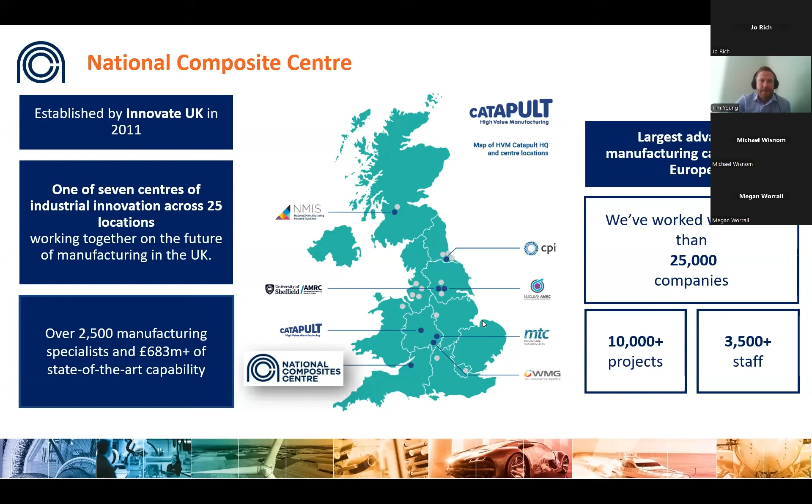A key element of our work is addressing industrial transformation. It means resolving deep and complex technology challenges, supporting people with new capabilities that meet the requirements of future industries, and supporting the growth, resilience, and sustainability of our existing and new supply chains. An example from our impact report is we've resulted in a £59 million direct gross GVA per annum and seen a 16% increase in supported organisations' turnover within 6 years.

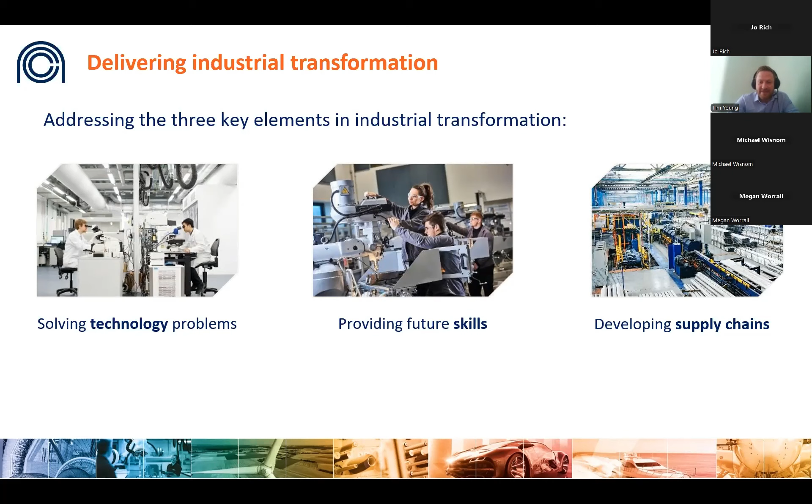The NCC's core strength is as an innovation platform. We work across all industries, such as aerospace, and all forms of mobility, energy transition, such as wind and security and space. Our composite manufacturing capabilities flex themselves to supporting academic pull-through of new ideas, from statistical models, new material concepts, through to detailed designs and analysis, manufacturing, verification of parts, subsystems, and assembled products. This is underpinned by our cross-cutting areas of technology research, hydrogen, digital, and sustainability.

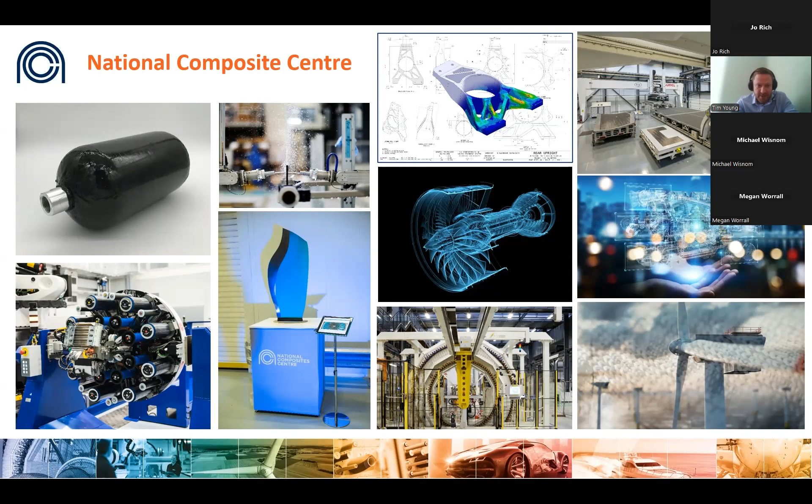With world-class manufacturing capabilities for composites, we've inherited some incredibly strong sustainability arguments, and our work supports key net zero technology developments in the 10-point plan for the green industrial revolution. However, as composites have exceptional performance and durability, we've engineered a material system that has massive benefits in the use phase, but that same durability means their derivation from non-renewable sources and complex end-of-life management is a serious challenge. It comes with the first key take-home: it is no longer acceptable to only focus on the in-use benefits of composites.

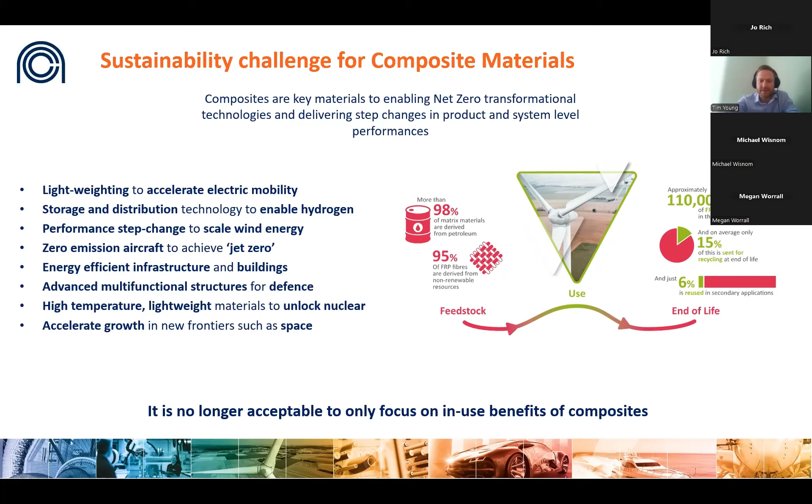What are we talking about, what else is there outside of the in-use benefits of composites? Over the next phase of the presentation, the outcomes of a body of work we've undertaken at the NCC to unpick what the real challenges are, not just to convince ourselves there's a problem, but to guide our recommendations based on facts for who, where, how, what, why, and more importantly, most importantly, when.

I'll then present the outcome of some work on the topic of the talk: what can we do versus what should we do, with a real focus on the circularity aspect on recycling. I appreciate there's a lot of aspects around defossilization and new materials, but the purpose here at the moment is on the recycling end.

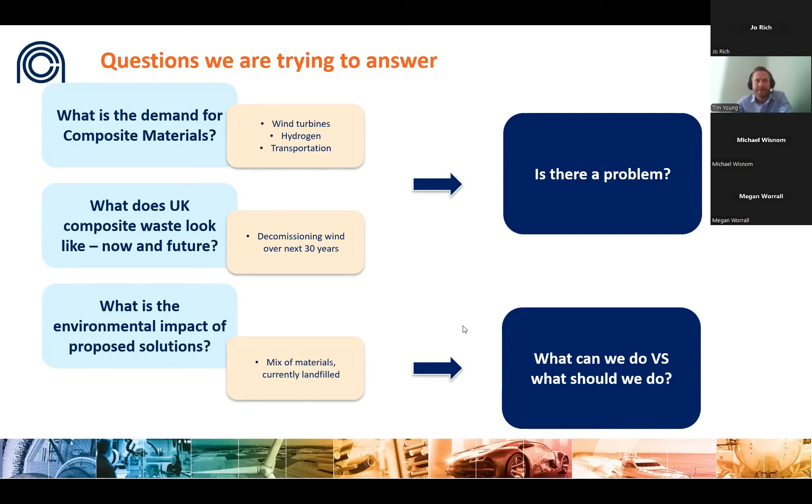There have been various studies based on UK total composite waste. The exact numbers vary, but they all agree that whilst we have a problem now, the current manufacturing output, coupled with known order books, growth forecasts, and projected life expectancies of components and platforms, puts the waste figure somewhere between 150 kiloton and 275 kiloton by 2035 in the UK.

I'm also sharing two snapshots of deep dive reviews on how the waste is manifested. Something particularly interesting to me from the wind study on the right hand side, just from UK offshore blade waste, is that the volumes today might be small, but they grow exponentially over the next two decades. And whilst we have a focus on glass, the increasing length of blade and use of carbon means that optimal solutions today for wind and other industries might actually need a rethink in 10 to 20 years. And it leads us to a big question: is it a one-size-fits-all approach?

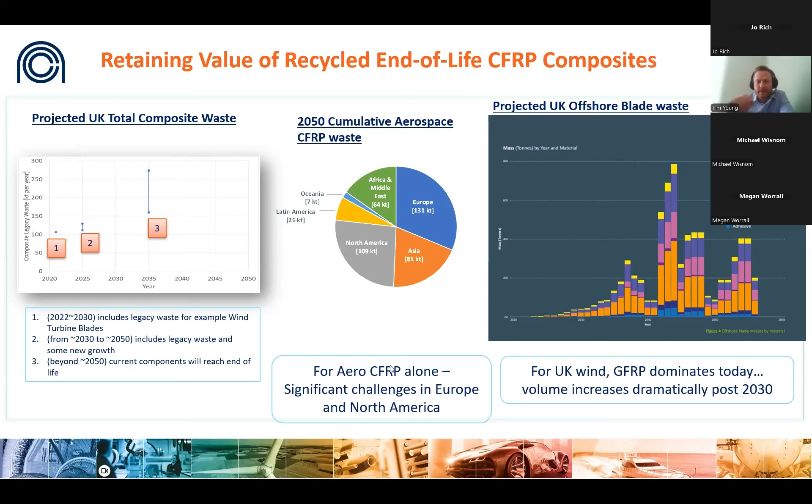So what are we doing? What's the backdrop to some of these challenges? What have we been looking at the NCC? The National Composites Centre has committed a significant portion of its available grants to build capabilities in sustainability.

So on the screen, I'm sharing a series of programs and projects around circularity, from network and review-based activities such as Rediscover, a network with representatives from a multitude of industries and academia, trying to highlight exactly what the challenges were. We've run four years of multi-sectoral pre-competitive research on recycling, covering everything from shredding to manufacturing of second life parts.

We're working across consumable waste. We've made some real strides which we plan to investigate further. I'm going to touch on the continuous fibre tank recycling work in a later slide. But overall, wherever possible, we've tried to maintain a technology agnostic approach to recycling, and in particular to the reclamation technologies. So I'm going to share some data and some of our positions and understanding going forward.

The last four years assessing and stress testing different technology options has been across manufacturing consumables through to full wind blade studies. And it's given us some unique insights into the practicality and, more importantly, the room for innovation.

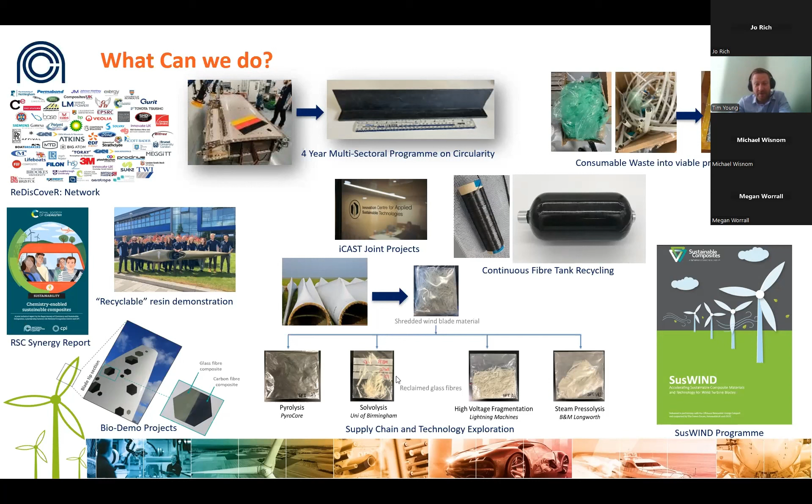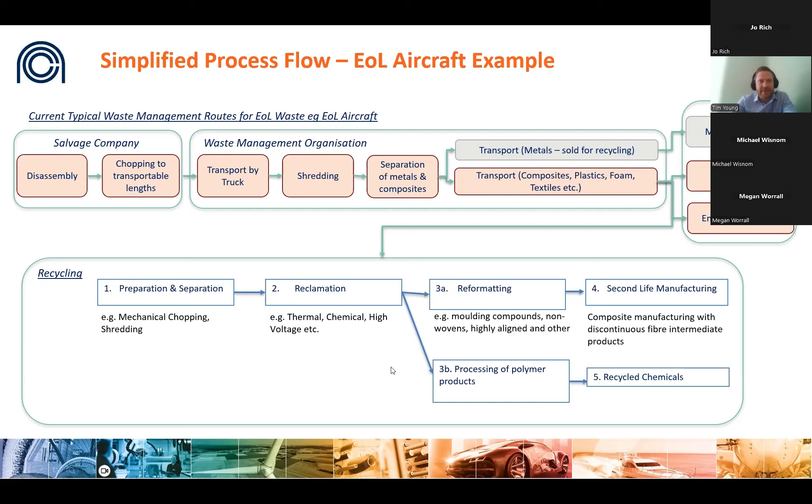So how can we change it? One of the areas we at the NCC hope to make a difference is to develop the product applications and therefore market for recycled materials, both fibre and matrix.

This is one of our flagship projects alongside the Henry Royce, Cygnet Texkimp and the National Physical Laboratory. The aim here is to develop quality assurance capabilities for recycled continuous carbon fibre. And what I'd like to see is real life data at scale and rate that can be used by designers for the next product.

If the uptake of carbon fibre is half of what is predicted, then recycled materials in application—and I mean the right application—will substantially reduce the system burden on our environment.

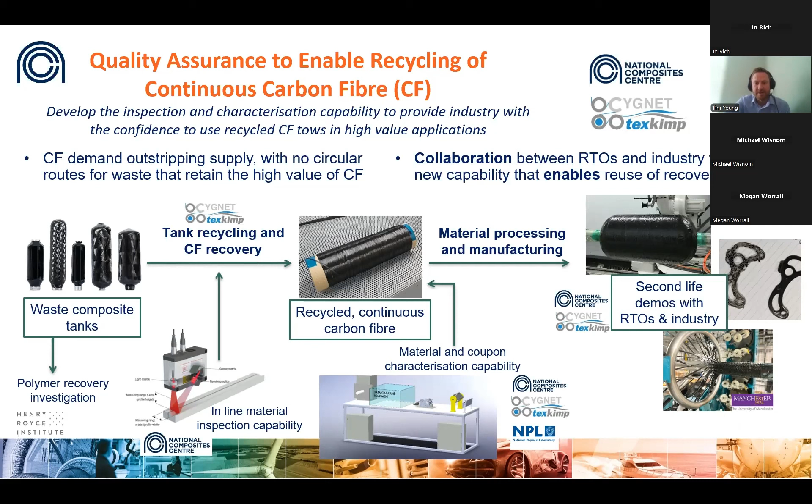Within SUSWIND, a programme at the NCC with a multitude of partners, industry and other RTOs, funders and asset owners, we developed a series of very specific scenarios to understand what pathways for recycling might result in the best outcome in terms of global warming potential and mass balance.

We first studied this for a wind blade system, and it was apparent that certain routes weren't viable, such as cement kiln, either because of the presence of PVC coatings in legacy blades or carbon in future designs. And it's raised a key recommendation that to achieve the optimal outcome, dismantling and separation of material types is required as early on in the process as is feasible, but ideally well before the system is shredded.

The gains or costs for glass recycling are quite small, but the volumes are really large. So mechanical recovery in cement kilns looks like the most optimal today. This is from data about 2022, particularly if the recovered material replaces and therefore reduces the amount of virgin material otherwise consumed or made.

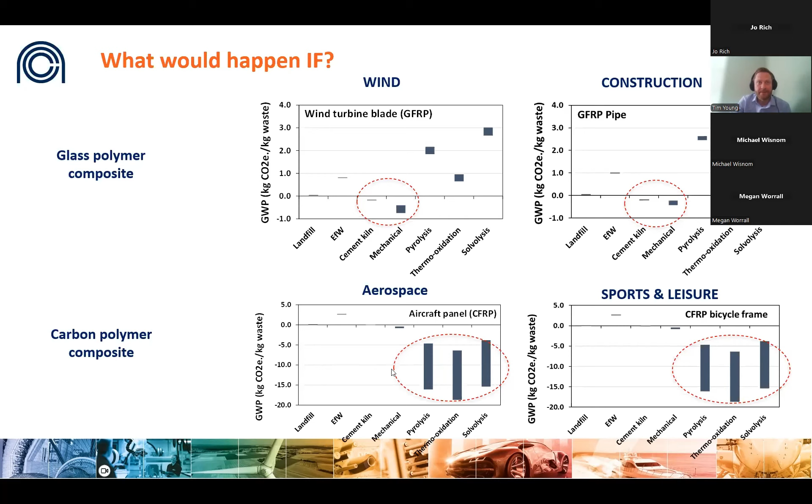So that leads us to an earlier question: what should we do? GFRP, glass fiber reinforced plastic, dominates by volume and has a significant landfill burden. CFRP has a larger potential to reduce global greenhouse gas emissions. It suggests to me two things.

We should use what capabilities we have today to reduce the burden of both materials. For today, that means adopting cement and mechanical recovery processes for GFRP. It also means utilizing and developing technology approaches for carbon reinforced plastic, and then applying those same technologies to GFRP as the existing routes phase out.

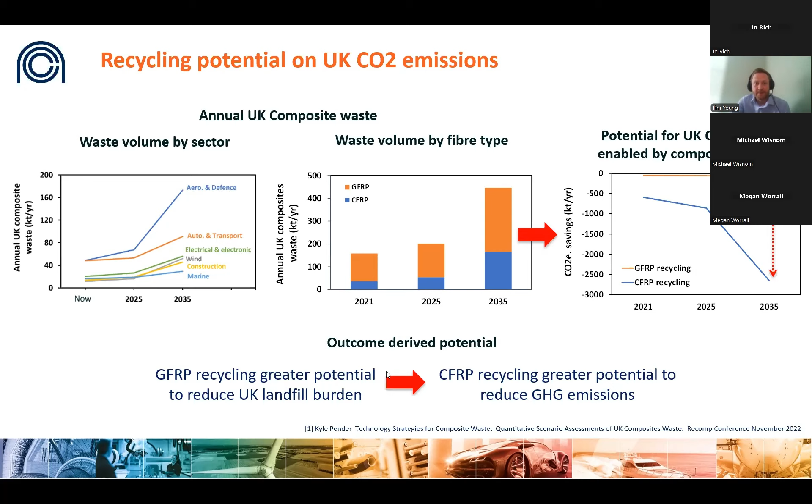As a summary, the data doesn't suggest that technical routes like pyrolysis shouldn't be used for glass, merely that they need development and scale in order to represent a better environmental option than the mechanical routes, for example.

This is why the NCC's focus is to develop these technologies first with carbon in mind, as well as to develop the surrounding system and economic cases to support the supply chains. How can we support those developing glass-based recovery methods based on the learnings we take from carbon?

This means everything from separation, reformatting, quality assurance, and all that's needed to see the recovered materials, both fiber and matrices, utilized in future applications.

As a note on the matrices, over the last few years we've seen an increase in the number of recyclable matrices, bio-based matrices, and other variations. These materials aren't always being developed in tandem with the supply chain or the technologies needed to manage them end of life. In the earlier scenarios, the matrix is either a waste byproduct or fuel in the process.

What we've proven is that glass and carbon recovery is technically viable. There's a significant opportunity to innovate and build the supply chains now and for a future state. But a key part of it is to innovate in resin recovery, both to support the economic case, but also to boost circularity and reduce the global warming potential of composites.

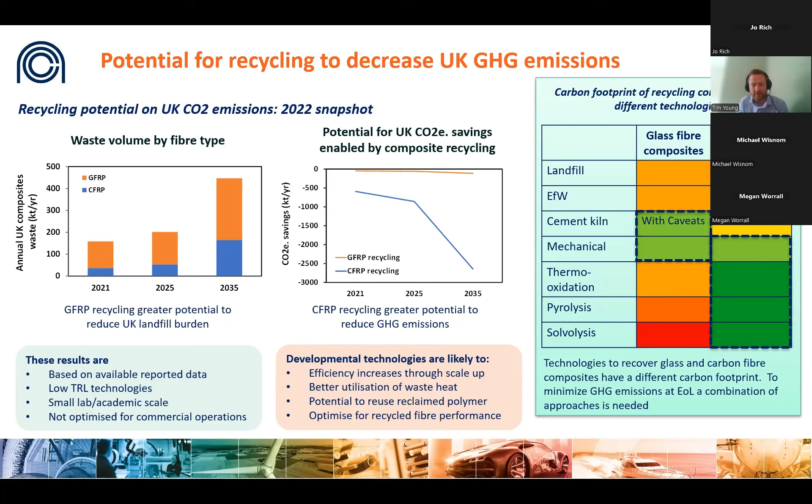So I just want to leave you with a few takeaways from our findings. We need to innovate across all technologies. We need to focus on target-driven approaches. Global warming potential is one metric, but we need to ensure that its priority doesn't inhibit us from taking any action at all. We can resort back to the use case argument.

Composites do and are essential in the delivery of key products needed for the 10-point plan. What we should do is innovate. Some routes have far better potential than we are realizing today. Collaboration is needed to pull on these supply chains, as today the numbers might be small, but the cumulative impact will require far more supply chain and technical capabilities in the future.

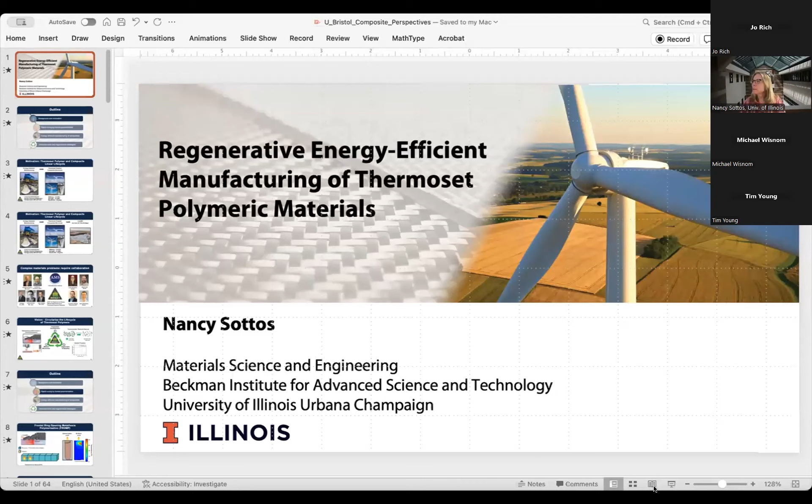So I'll get started. I'm Nancy Sottos, introduced earlier, from the University of Illinois, Urbana-Champaign, and happy to talk to you today about our work on regenerative energy efficient manufacturing of thermoset polymeric materials and composites.

So it's a short talk, but I even put an outline on short talks. I just want to provide some motivation for the strategy we are pursuing at Illinois, talk about a rapid curing technique by frontal polymerization, and then continue on to how we apply this to energy efficient manufacturing of composites, finishing up with how we use this to impart deconstruction and regenerative strategies for composites.

So starting out with the background, I think we know that thermoset polymer composite structures—this was outlined very nicely in Tim's talk—we've designed them to have high strength, high stiffness, and last for 30 years in some pretty harsh conditions. We also know that these materials, in order to get these properties, have a very energy intensive manufacturing process.

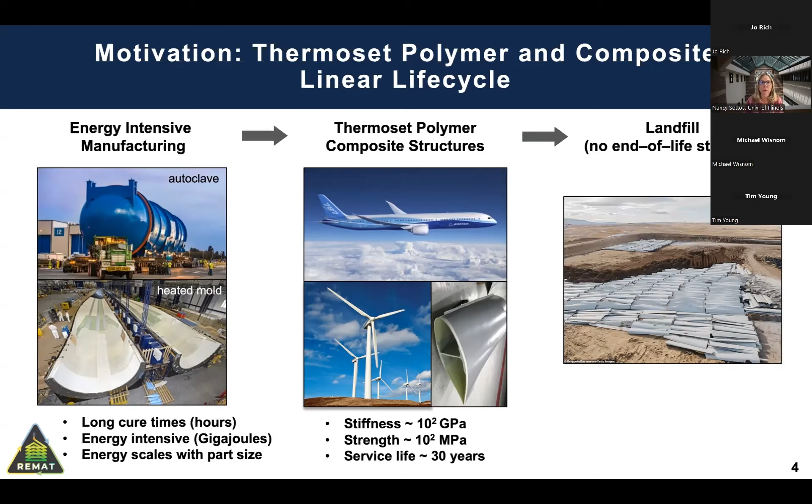The cure times are long in order to get the cross-linking up. They're energy intensive—the part gets larger, the energy keeps scaling with the part size. And also, there's really no viable end-of-life strategies. Tim's talk outlined really all the different mechanisms going on. There are many groups working on this, but it is definitely expensive and complex to upcycle and recycle composite materials at this point, and just a really good opportunity for research in this field.

So just a little bit about our vision of the center. This isn't where we're at yet, but just a little bit about the philosophy of how we're approaching this problem of circularizing the life cycle of thermoset polymers.

It starts with a manufacturing platform based on frontal polymerization. The idea is to be able to efficiently manufacture composites out of autoclave using techniques that save energy and time. My image here shows an additive technique. Unfortunately, I won't be able to talk about what we're doing in additive this morning—I stuck with just more traditional ways of making composites, but that's something that we're doing.

Then our approach—and there are many approaches being considered for thermosets right now—is a programmed deconstruction. At the beginning, we impart a cleavable comonomer into the network so that at the right time you can trigger deconstruction into oligomeric fragments. The goal is to take those fragments, recover the useful oligomer units, as well as any reinforcement that you've put in. And of course the goal is to maintain properties as you're putting in these deconstruction units. I'll talk about some of the challenges of what happens when you drop these units into a thermosetting system.

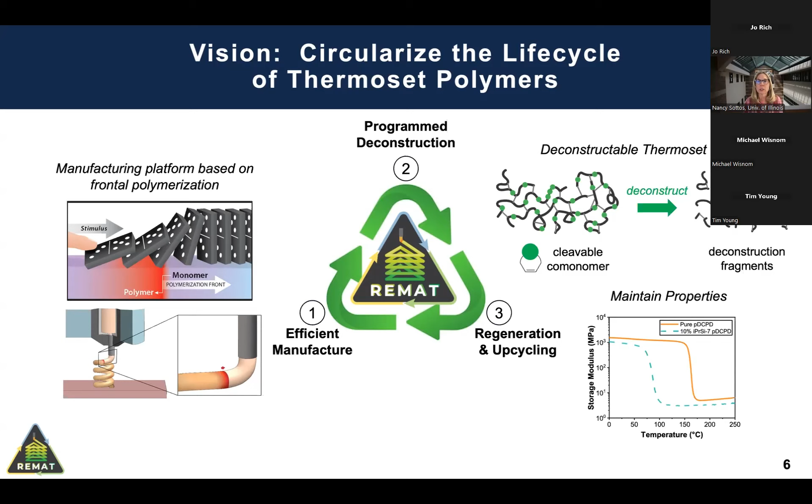Let me start out talking about the manufacturing process, because I think that any good deconstruction strategy really does start at the beginning in the initial design and manufacturing of the material. We are using a process called frontal ring opening metathesis polymerization to make our composites.

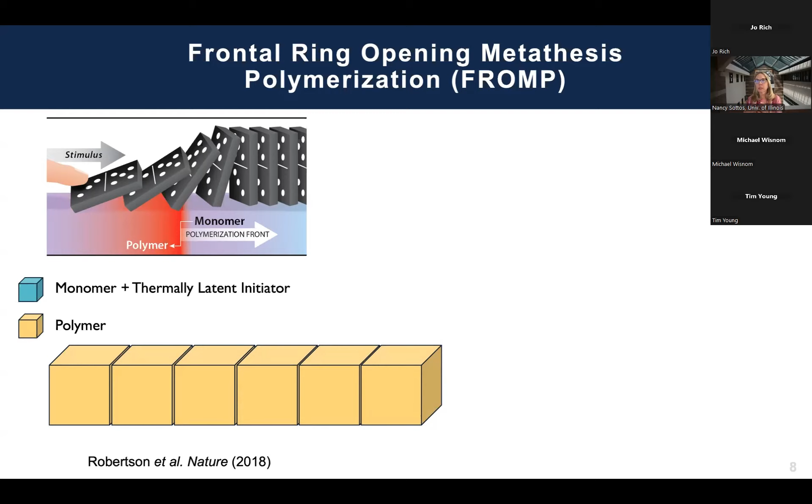If you haven't heard of this, frontal polymerization is a process by which you go from monomer to polymer using the inherent exothermic reaction of the material. All you really need to do is add a small amount of heat at the beginning, and that causes the monomer to locally convert to polymer. Heat is generated in the process, it diffuses forward, and it sets up a propagating front. You can see in the image above, it's like dominoes—you just put a little bit of energy in, and then the exothermic reaction takes place and moves, giving you a uniform reaction front when you're doing everything correctly.

In a test tube, it looks like the images you see on the right. You have a uniform propagating front—the heat has been applied at the top. On the right you see the IR video, and you can see there's quite a bit of heat generated, diffusing forward and moving with the front as it goes down, and then basically you convert to 100% polymer.

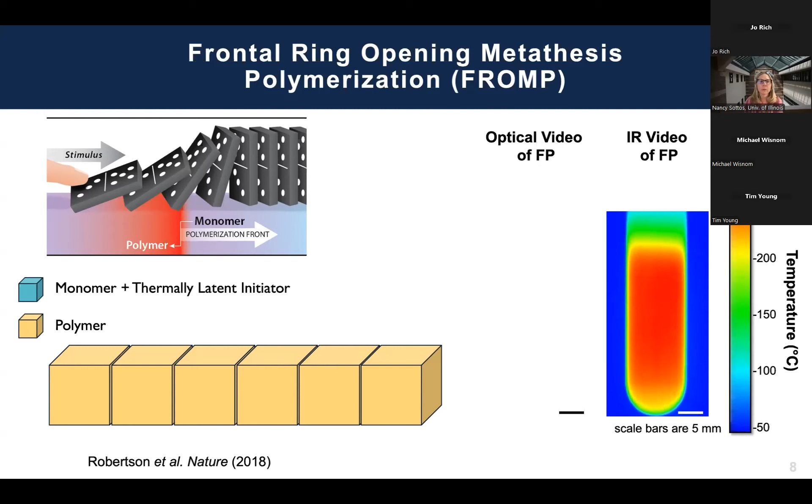The chemistry that we are using is not an epoxy, it is a cyclic olefin. There's a lot of advantages to exploring this strategy in cyclic olefins, and we're in particular looking at the frontal ring opening metathesis polymerization—we use the word FROMP for short. It's kind of a funny acronym of dicyclopentadiene. This is a commercially used monomer—there's actually people making wind turbine blades; ExxonMobil is now making wind turbine blades with dicyclopentadiene.

As I mentioned, the key to this all, I'm going to go over the chemistry very quickly, is this inhibitor, because basically you mix all these components together to formulate it. It's an active system that could react, but you have an inhibitor that gives you some time, some pot life, in order to get it infused into a composite or print it. We've worked a lot with these phosphite inhibitors that can give us, with the right formulation, up to 30 hours of working time.

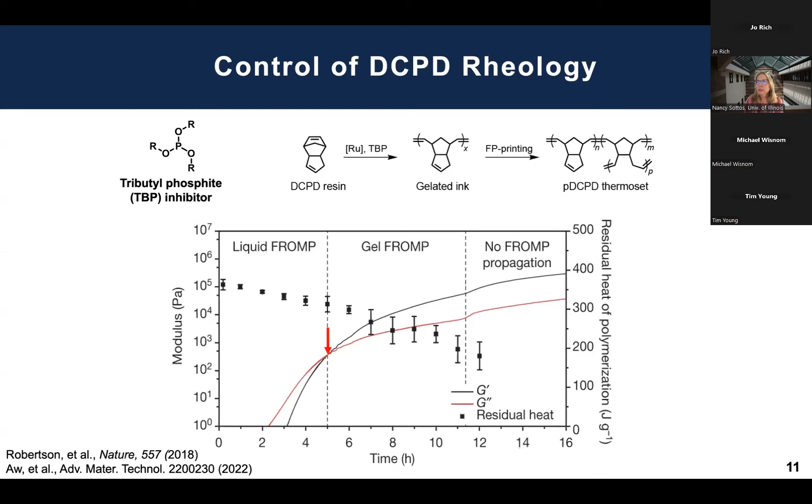In these different stages, early on with this particular formulation, if we work before 5 hours, we're able to infuse this resin into composites. We have plenty of time to do that and create high quality composites. That's what I'm going to talk about today. If you wait a little bit longer and you get into the gel state, you have a material that has the right rheology for 3D printing. That's something I'm not going to talk about.

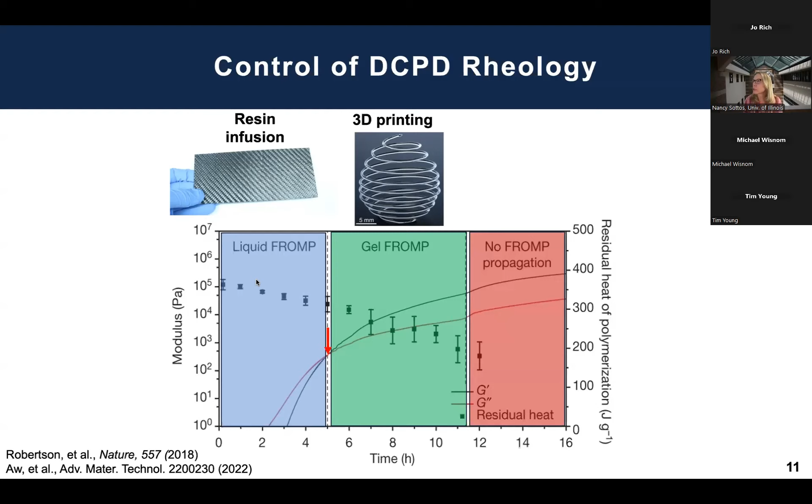And of course, if you wait even longer, in this case it was 11 hours of pot life, you won't get this frontal effect - there's a background reaction that occurs and you just kind of get an undesirable material with no capability for frontal polymerization. So let me tell you about how we've put this into composites.

One technique we've been using is vacuum-assisted resin transfer molding, or VARTM for short. Basically we infuse the resin in. DCPD has a very, very low viscosity, so it's very amenable to things like VARTM. We can use a traditional bagging technique, and the first thing we did was use an edge trigger. We're able to process a panel very quickly.

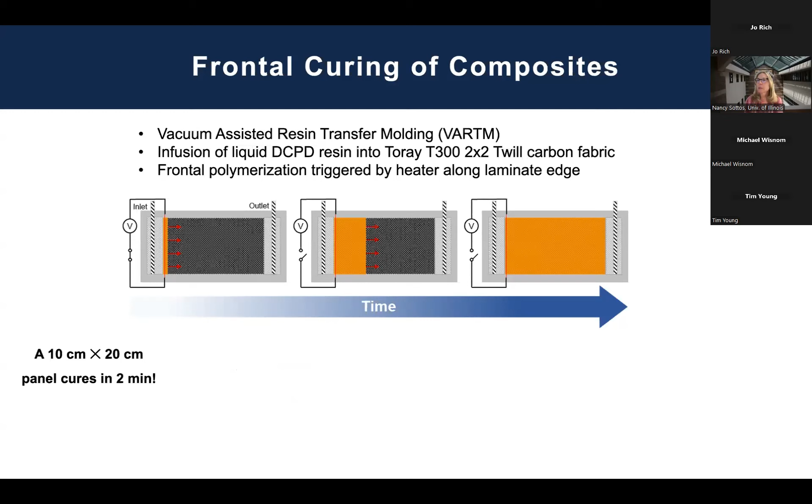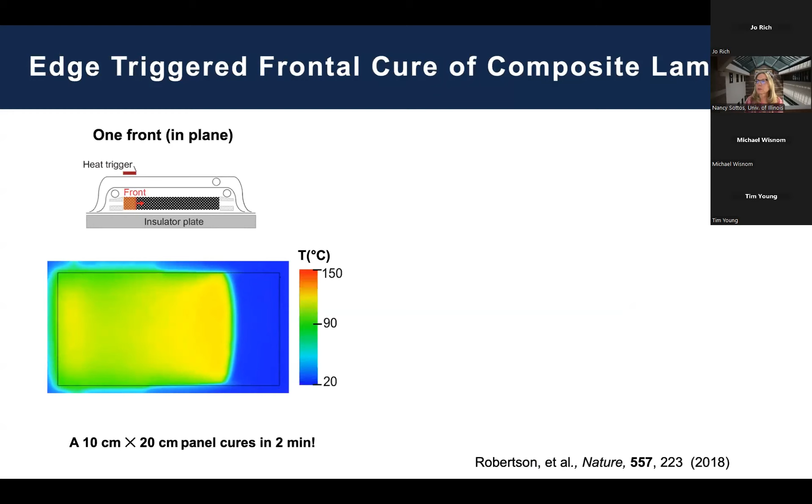Let me show you a video of this. It's going to trigger along this left edge. In this case it's a 10 by 20 centimeter panel. That's the trigger. Now there's just a little bit of energy added in - it's actually 5 seconds the resistive heater is on. And then that's enough to locally heat it and propagate this front. This is kind of dramatic as we propagate the front along the panel, but that's the way we did it first. And you're able to cure this panel in 2 minutes.

And we've made panels up to 35 by 35 centimeters. You can get kind of complex shapes - you can have the front travel along a corrugation in the flat panel. I just show a cross section there. It's a nice material. These are all woven fabrics that we've looked at.

51% volume fraction in these early ones, low void content, and a pretty good Tg, 134 C, a little bit below that of the neat resin system. That's due to these early processing methods.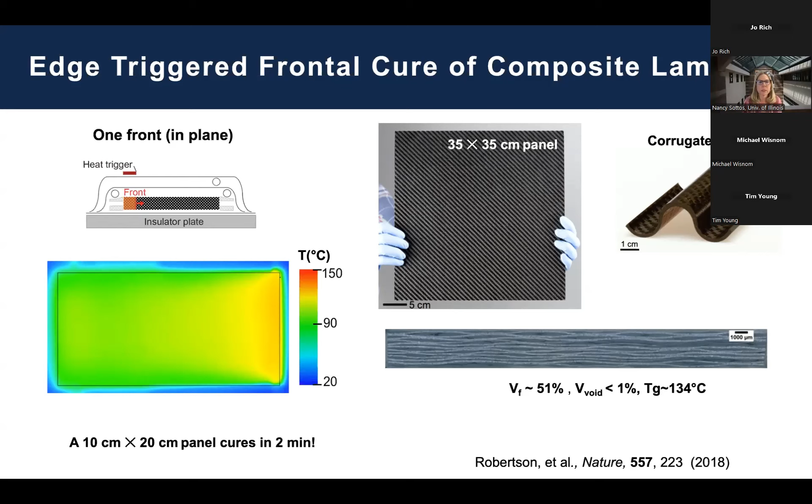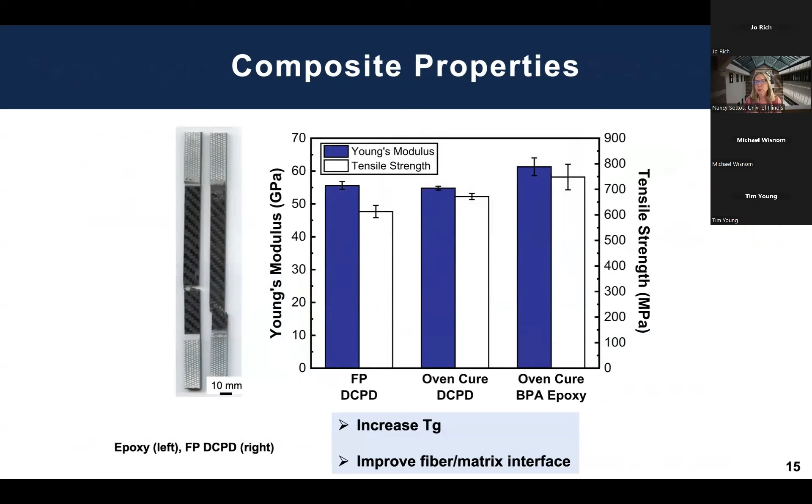The properties of the system are pretty good. This is the frontally cured composite compared to an oven cure of the same material, compared to an oven cure autoclave cure of a similar epoxy, our comparison aerospace grade epoxy. It's a little bit under the mark, but pretty good. There's things we've been working on along the way about increasing glass transition temperature. The fibers are all sized for epoxide, so we've got lots of challenges on fiber-matrix interface that we've been working on. But overall, a nice result.

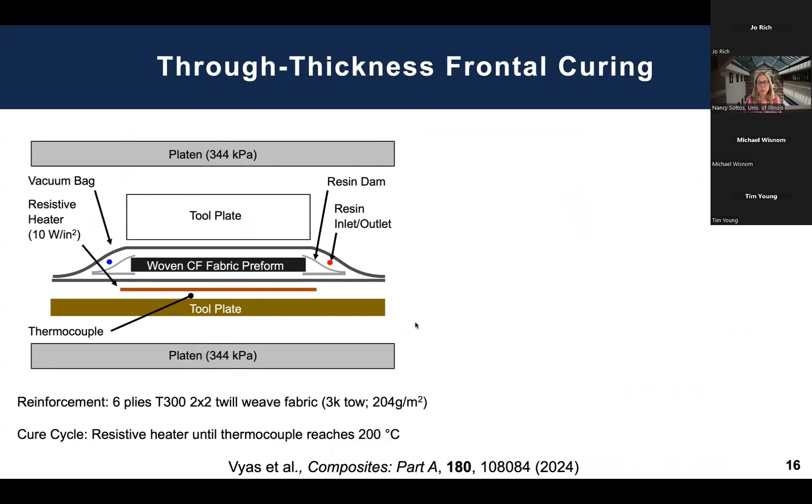Since that time, it isn't really practical to move the front along the panel. You can actually do this even more quickly if you do a through-thickness cure, so the heat comes up through the bottom, just through the thickness. And if you add a little more energy, as I show here, you can cure the composite through the thickness. You see the IR image of just the wave coming through. This can produce actually very nice composites - we can get the Tgs well up over 150 to 160 degrees C.

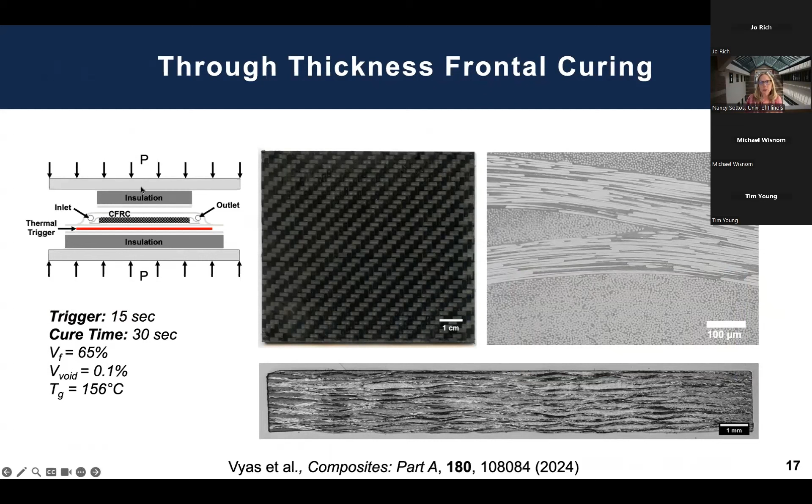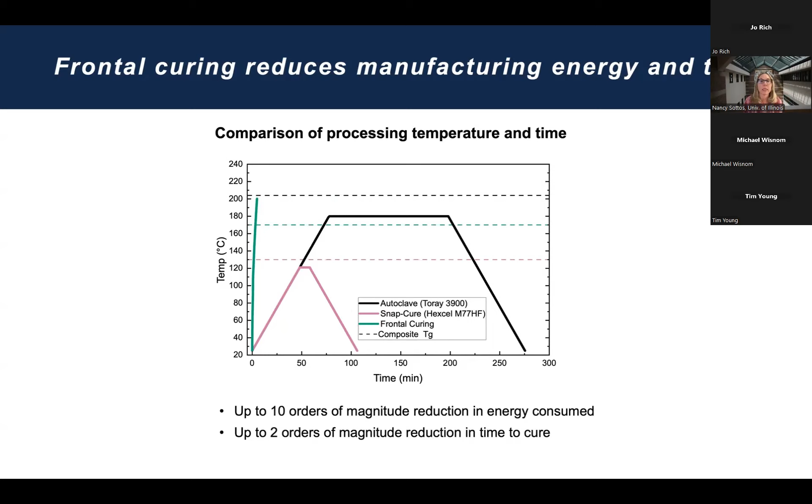If you look at the temperature-time curve, I compare it to some more snap cure systems that are on the market currently, which still require heat up and a little bit longer times. And then of course, a more traditional autoclave cure. So there's a lot of time and energy saved on the way in terms of sustainability.

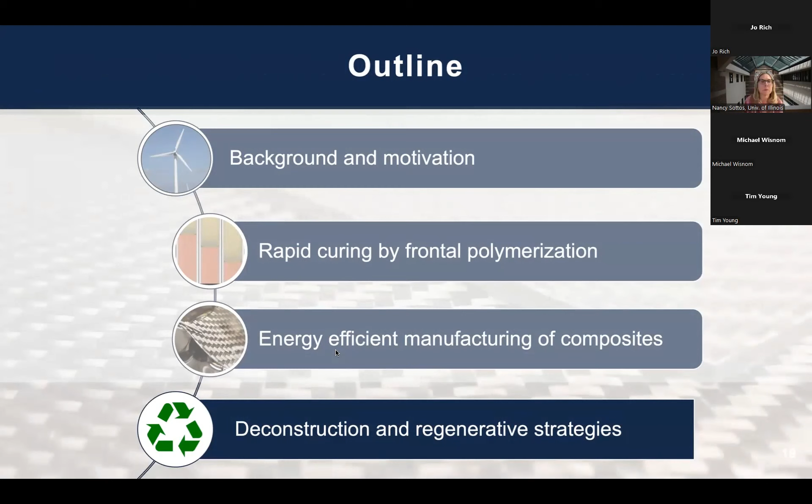But now to tie in terms of looking at ways to recycle and reclaim composite materials, I want to discuss some of the deconstruction strategies we've used for this polydicyclopentadiene thermoset. A crosslink network, normally we've been taught, is not deconstructible. It's a permanent network, that's what gives us those great properties. And PDCPD is no exception. We've been teaming with Jeremiah Johnson's group at MIT - he's in the chemistry department there - and has been working on these cleavable strategies. Actually, this is a great COVID collaboration that started over Zoom. But the idea is to introduce these cleavable groups into the backbone of the monomers.

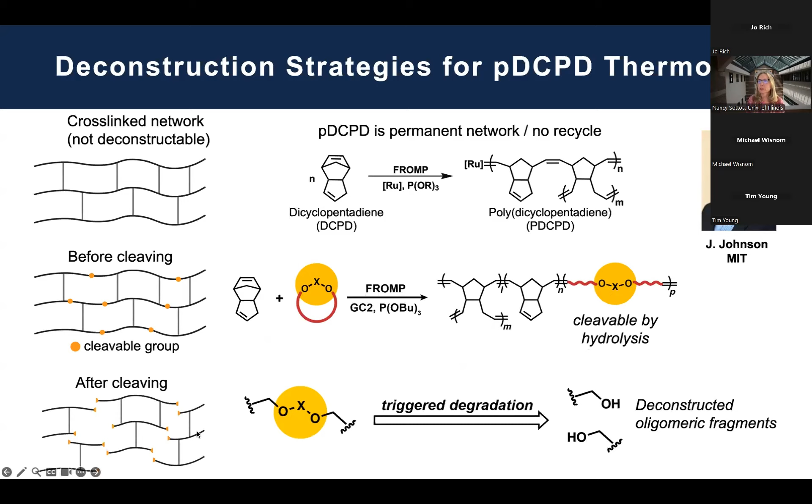And the idea is, can we also energy efficiently frontally polymerize these systems? Then basically we have these groups that are cleavable by hydrolysis that will let us recover oligomeric fragments. So this is basically the idea: after cleaving, you have a very triggered degradation. You have the oligomeric fragments with some very reactive handles on them that can be upcycled into something else.

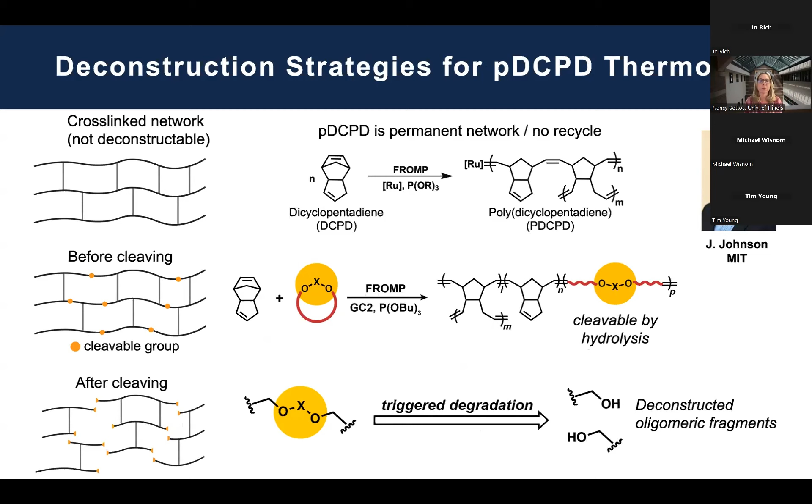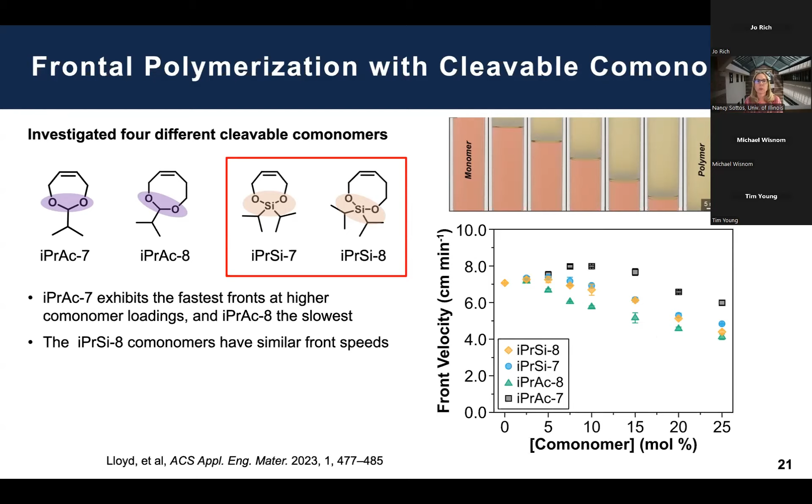But what the graph on the right shows is that, yes, I can add this comonomer - it still will frontally polymerize. It slows down as you add more, but you really don't want to be adding 20 mole% of the comonomer. I want to stay in this window, as you'll see from the properties. It turns out that these 7- and 8-member silyl ethers incorporate best into the network and actually are the most efficient at deconstruction. Let me show you a little bit about the deconstruction process.

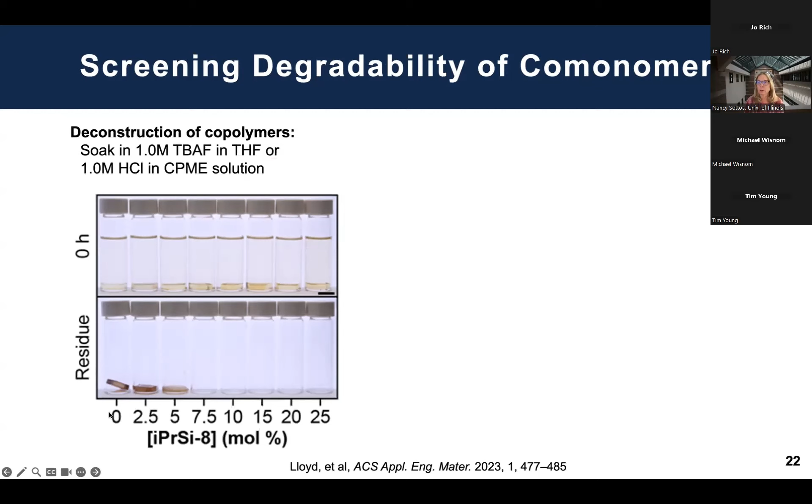These are just little scint vials with pure polymer in them. This has been frontally polymerized at 0 hours, and you can see there's different amounts of the cleavable comonomer in here. So at 0%, you would expect no deconstruction because that's a permanent network. And then as you move along with time, what you can see - this is actually after 16 hours - is that these materials with varying amounts... you can see that with 7.5 mole% of the cleavable comonomer, you get full dissolution of the thermoset network.

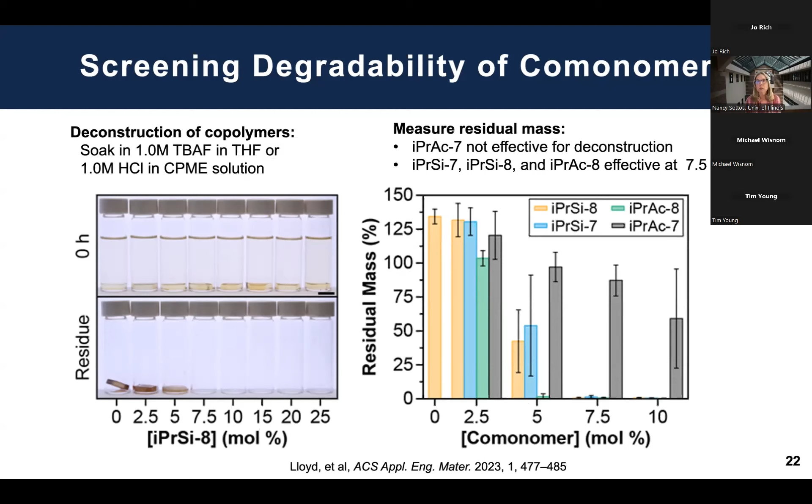Which is quite extraordinary. On the right, you see just plots of residual mass as a function of comonomer. Once you get to this 7.5 mole% comonomer for the 7- and 8-member cyclic silyl ethers, you really got no residual mass in the scint vial, and you've got a fully deconstructed thermoset material, which I find extraordinary. No heat during this process - it's just time for the hydrolysis to happen.

We've actually - I can give a longer talk - there's all sorts of clever ways to bring this Tg back up with cleavable cross-linkers. That's a pretty complex chemistry, but it's really something that can bring the Tg back up over 150C again.

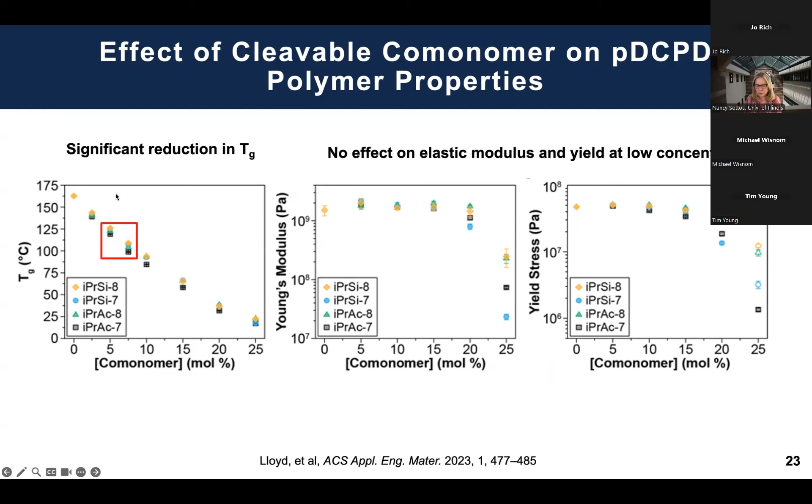But let me show you how the upcycling of the fragments also works. Basically, once we deconstruct this material, we're left with the oligomeric fragments. One of the first things that we did is, well, what can we make of them? At this point, they can't go back to dicyclopentadiene. What we added was a catalyst, and the idea is that we're going to bring this system into - so by adding isocyanate and catalyst, we can bring this system back to another useful polymer.

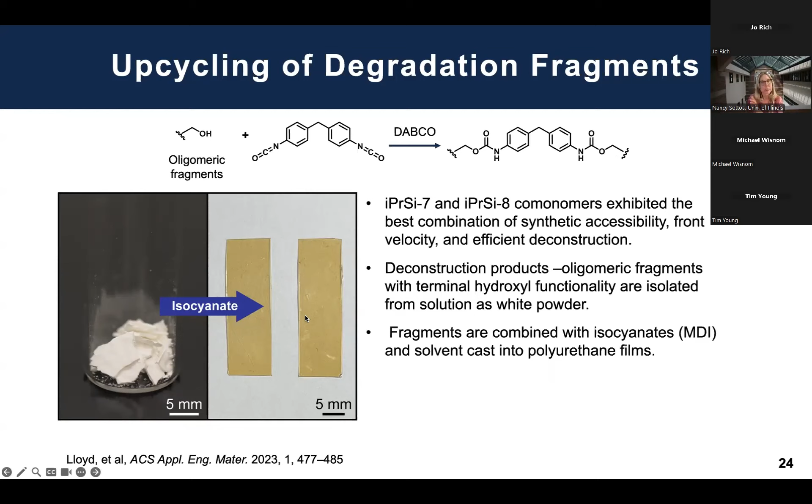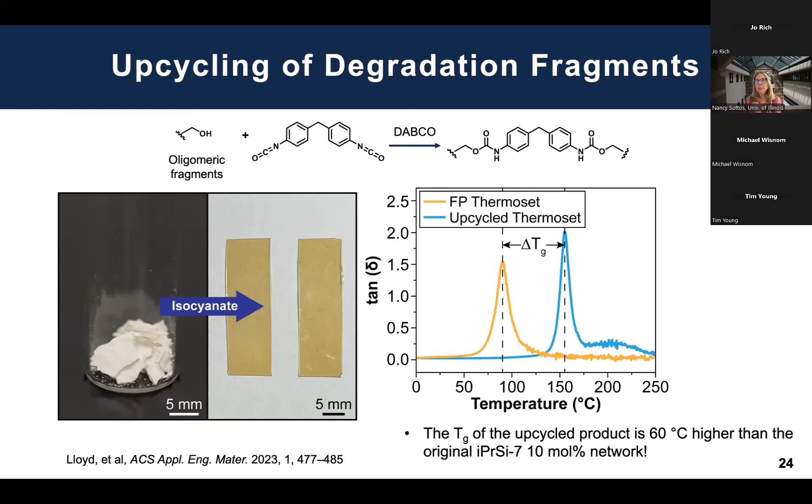The upcycled material that comes from these oligomeric fragments we recovered actually has a higher glass transition temperature. It's really quite a good material we've made. The strategy moving forward has been to add these fragments into pure monomer, just like you do with recycled polymers. We've gotten, I haven't put the data in this talk, we can put 30% of the recovered oligomers into monomer and get a pretty good polymer out. So there's a lot of interesting promise in making this circular as we explore different cross-linkers and cleavable comonomers for this system.

Let me finish up with the composite story. The idea is that we can take this same resin system we looked at extensively for its deconstruction, and put it into a carbon fiber reinforced composite, similar to the techniques I showed before, using a very rapid through-thickness cure. We make this thing in less than 2 minutes.

In this case, we started out with a lot of comonomer, 10 mol%, to make sure it deconstructs. You can see we've lost some properties from initially. We've got a Tg of 105, so still not a bad material. We're up over 100 C for our glass transition temperature, it's got nice properties, it's actually a very nice composite. I'll show the DMA data here on the right, the storage modulus and tan delta as a function of temperature.

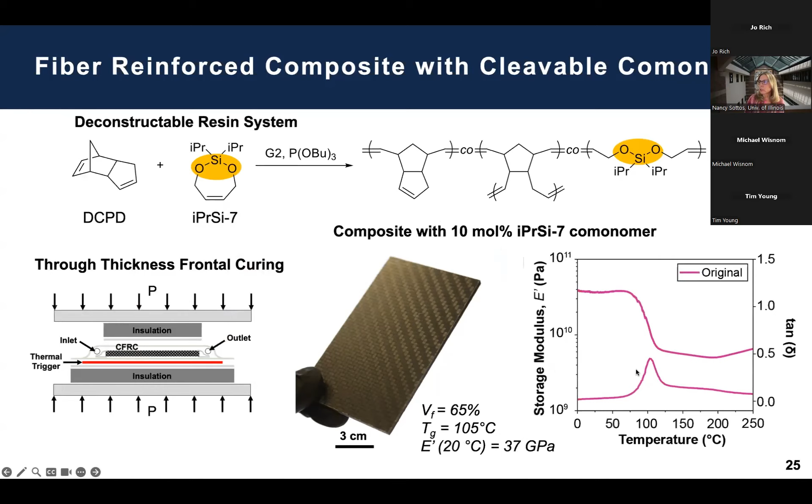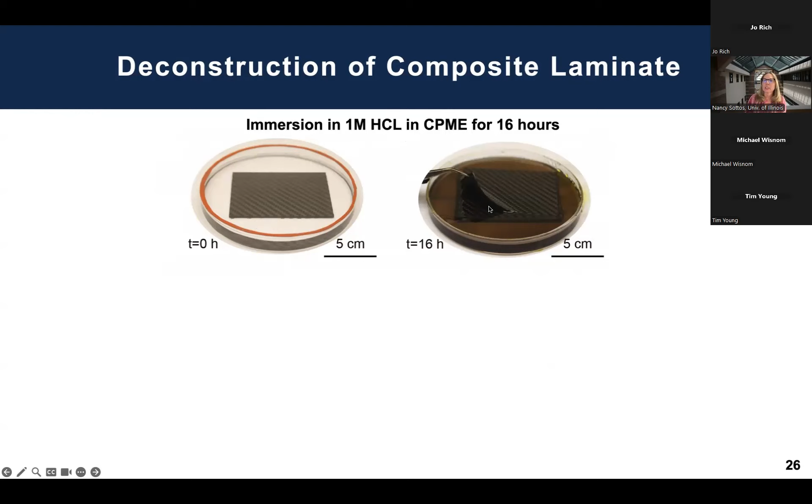So can we deconstruct this? This is immersion, basically the hydrolysis process. We're taking 1 molar HCl in CPME, and basically take the whole composite and soak it. What's interesting, I love this image, is that you can just start to see the fibers come out whole and undamaged. We can recover the carbon fabric, which was a discussion in the prior talk, and we can grab the oligomeric fragments from the solution after this is done.

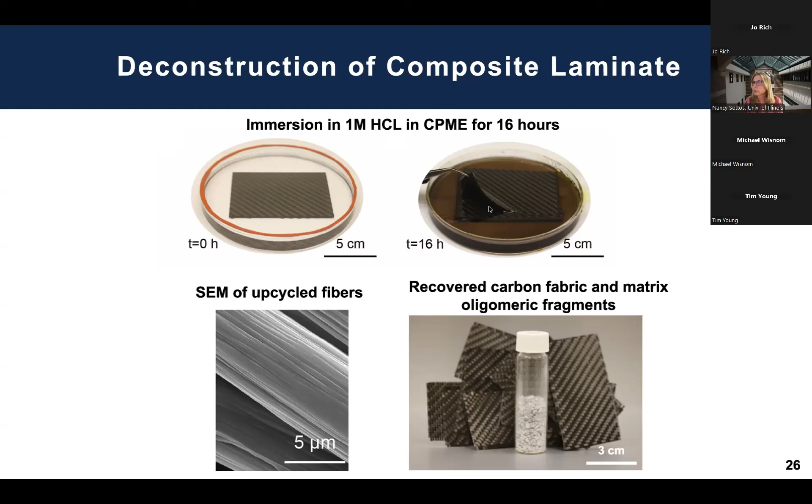I'm not going to show the XPS of the fibers, but they're remarkably clean, this is just an SEM to show you that. We're in the process of doing characterization on the tensile strength, but it's really promising. There's almost no damage to these fibers that we can see, and in fact they're super clean. They don't have sizing on them anymore, which is also a benefit.

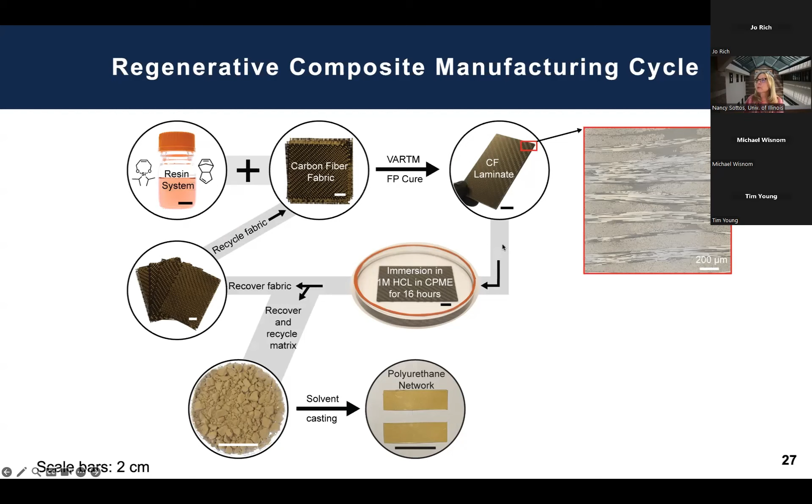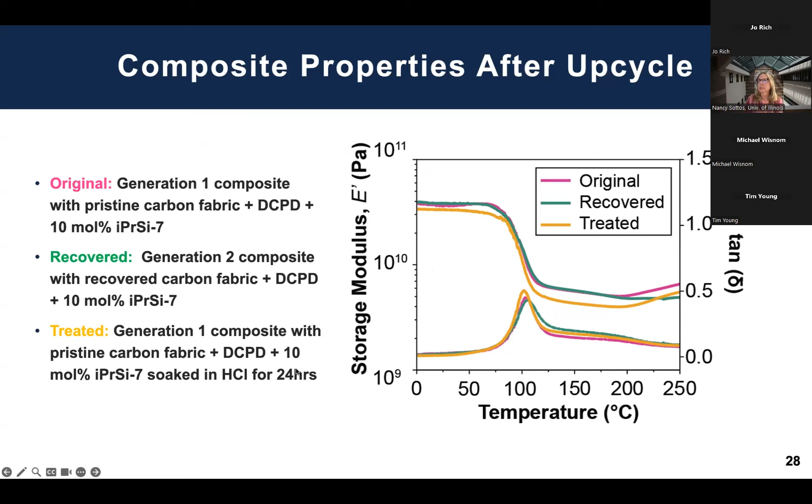Then I show you the recovered composite, where we've taken the fibers and rescued them out of the original, put them in a second generation composite, all new monomer in there, which is also still deconstructible. The recovered material has the same elastic properties and glass transition temperature as the initial. That's a great story. The gold curve here is a different control we've been looking at.

Let me end there, hopefully convincing you that frontal polymerization is an interesting process for composites. We can make them quickly out of autoclave with nice properties. We've been able to impart this cleavable comonomer that enables deconstruction of the neat resin and the composite. And we've successfully recovered fibers and reprocessed them into new composites with comparable properties.